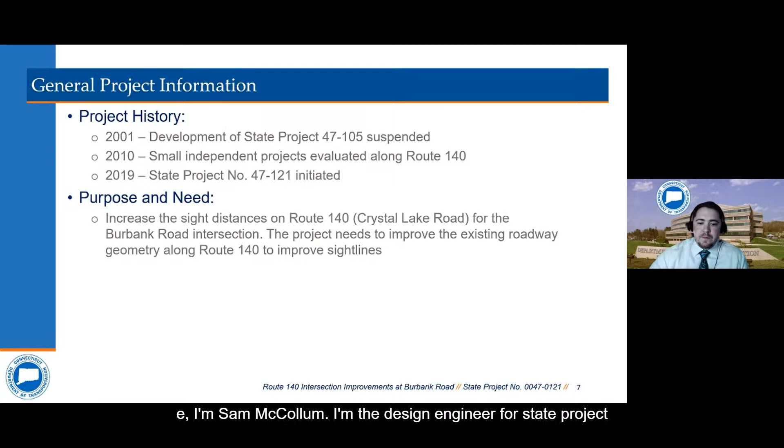Thanks, Ken. And with that, Sam will take us through the formal presentation. Thanks, Devin. Thanks, Ken. Hi everyone, I'm Sam McCollum, design engineer for State Project 47121, and I'll be taking you through the rest of this presentation today.

Starting off with a little bit of project background. So 47121 actually originates from State Project 47105, a corridor improvement project between Routes 83 and 30 along Route 140, which was suspended in 2001 due to overall public opposition and lack of funding. In 2010, the department began evaluating locations along Route 140 to initiate smaller independent projects. Then in 2019, State Project 47121 was initiated with a purpose and need to increase the sight distances on Route 140 for the Burbank Road intersection.

The project needs to improve the existing roadway geometry along Route 140 to improve these sight lines. Looking at our project schedule, we're set to complete design on August 30th, 2023, advertise for construction on September 27th, 2023, and construction is set to start in the spring of 2024. Currently we're at an estimated construction cost of about $4 million, with 80% federal funds and 20% state funds.

So just a brief overview of this presentation: we'll first go over our project location as well as some existing conditions. Then we'll review our crash history, which will bring us to our proposed improvements and the considerations we made when developing those improvements, and that'll bring us to our question and answer session.

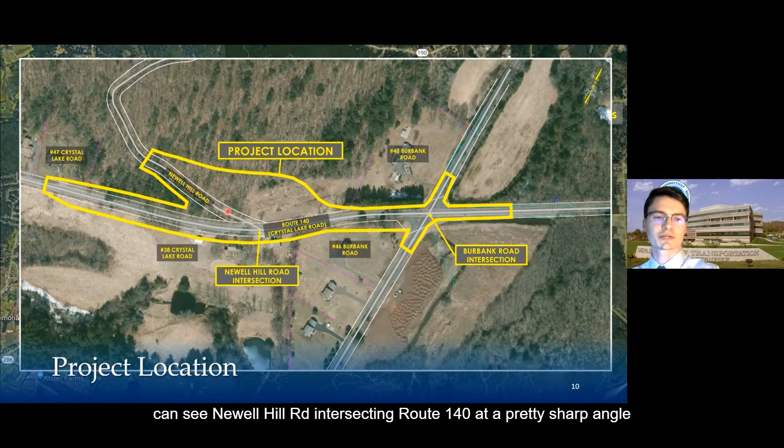All right, so starting with location. 47121 is located east of our Ellington Town Center here along Route 140 at its intersection with Newell Hill Road and Burbank Road. If we zoom in on our project location, you can see Newell Hill Road intersecting Route 140 at a pretty sharp angle, with Burbank Road intersecting Route 140 a little bit further east here.

Within this area we do have several residential properties, as well as wetlands on either side of Burbank Road and either side of Route 140, which then continue east outside of our project limits.

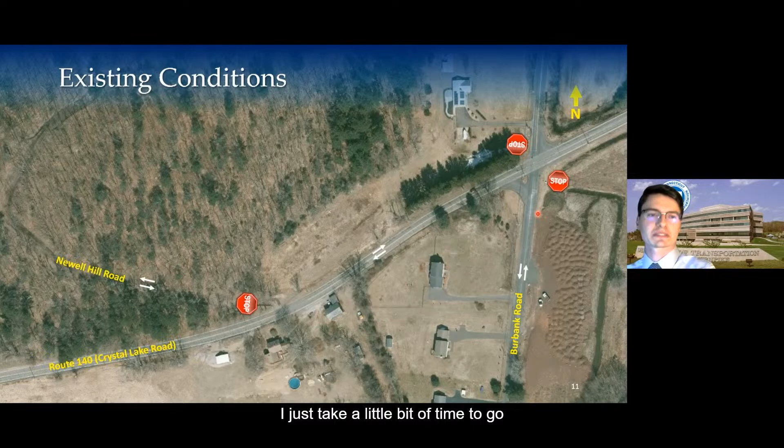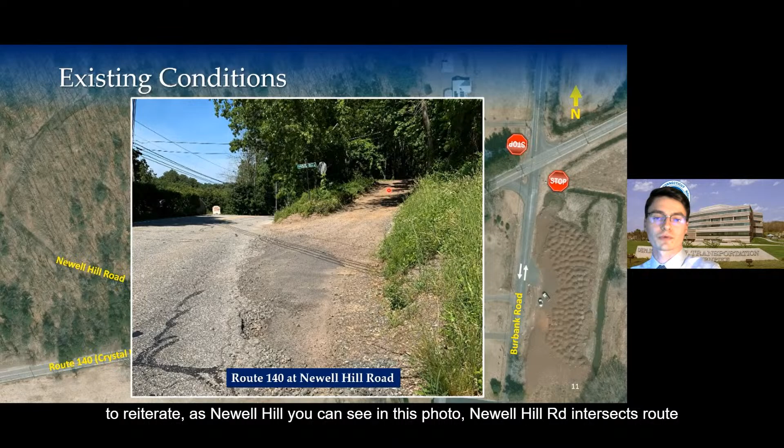I just want to take a little time to go through some existing site photos, starting at our Newell Hill Road intersection. As you can see in this photo, Newell Hill Road intersects Route 140 at a pretty sharp angle and at a pretty steep slope as well. At this intersection, Newell Hill Road is unpaved, but it does transition to pavement a little further north, outside of our project limits. As you can see, the side slope condition ends up being pretty poor — these slopes are very steep and heavily vegetated.

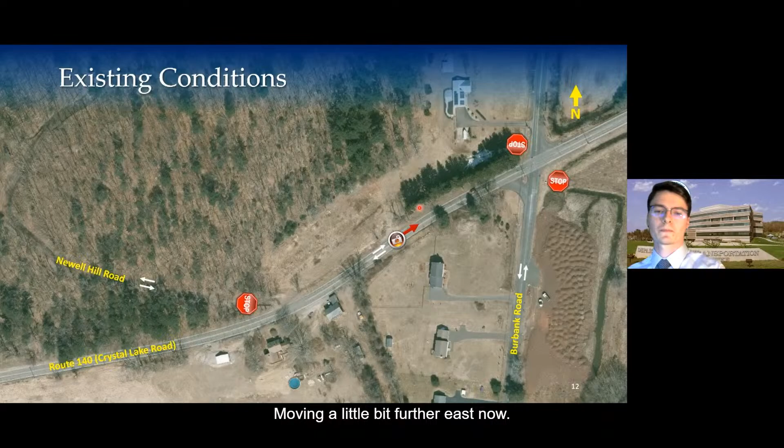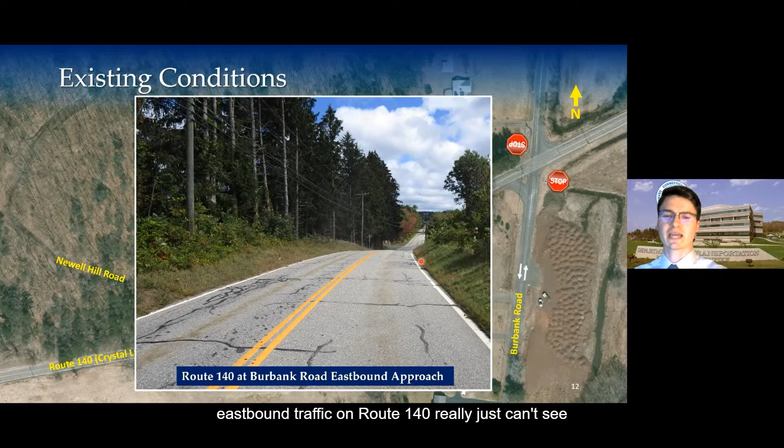Moving a little further east now, this next photo was taken looking down on Burbank Road from the top of Route 140, and I think it just demonstrates how eastbound traffic on Route 140 really can't see traffic maneuvering from our Burbank Road intersection, especially on the south end of Burbank there as well.

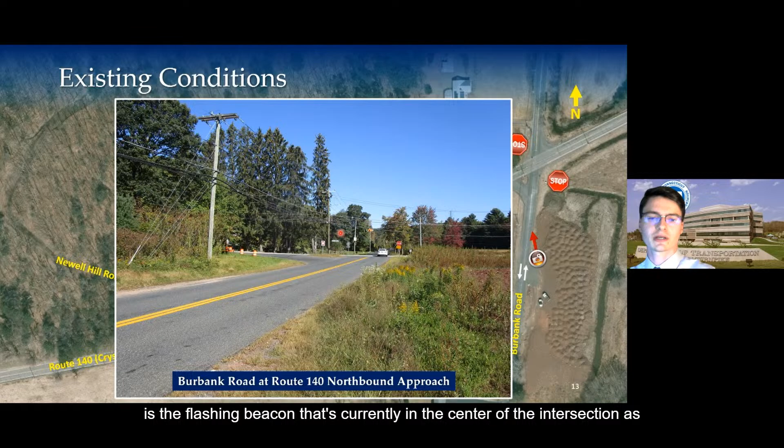Next photo was taken looking at our Burbank Road intersection from the south here. Really all I'd like to point out at this intersection is the flashing beacon currently in the center of the intersection, as well as this grass splitter island with a utility pole located on it.

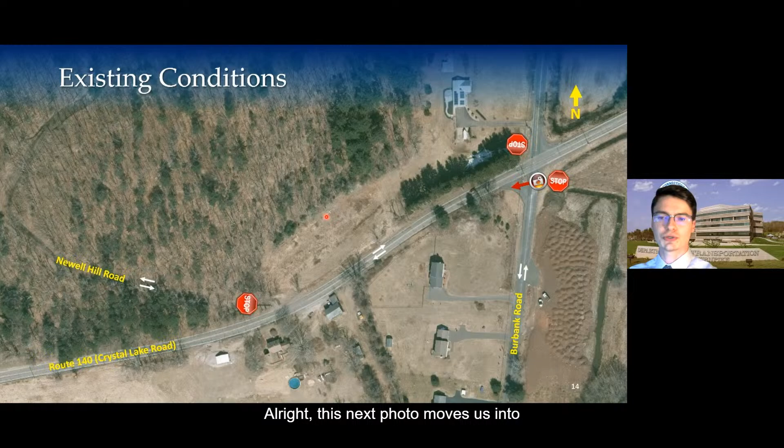This next photo moves us into the intersection now, taken from the perspective of a driver waiting at the south end of Burbank, looking west on Route 140. I think you can see in this photo just how quickly that sightline is obstructed, not only by the geometry of Route 140 in this area, but also these side slopes off to the side of the road here.

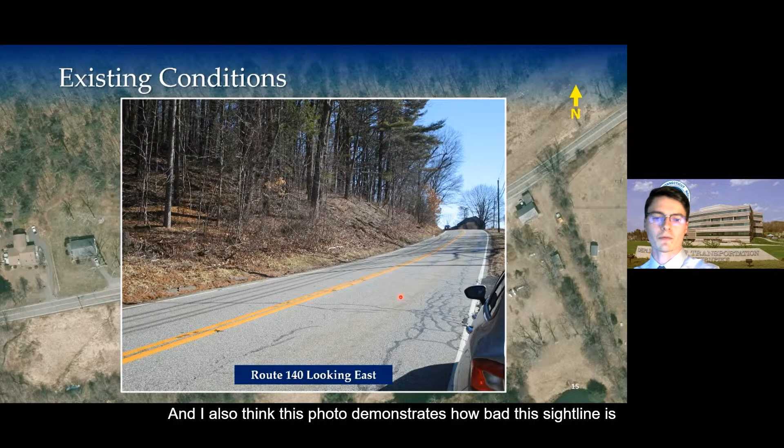Moving a little bit further west now, this next photo was taken looking east on Route 140. Again, all I'd like to point out are these steep side slopes between Newell Hill Road and Route 140. I also think this photo demonstrates how bad the sightline is for a vehicle traveling eastbound on Route 140 - you really just can't see traffic maneuvering from the Newell Hill Road intersection to the top of the hill either.

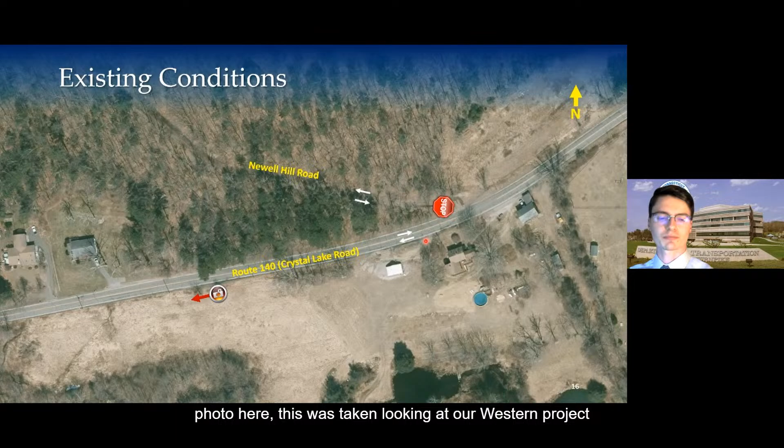This last photo here was taken looking at our western project limit. Really all I'd like to note with this is how steep these roadside slopes are directly off of the edge of road here on Route 140.

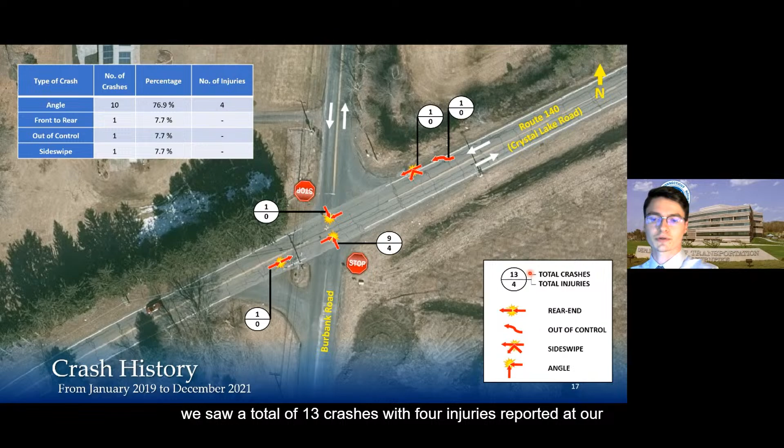Going to bring us to our crash history. Before I get into what you see in the center of your screen, I'll draw your attention to our legend on the bottom right-hand side. As you can see within the circle, we have our total crashes over our total injuries. In this case, from January 1st, 2019 to December 31st, 2021, we saw a total of 13 crashes with 4 injuries reported at the Burbank Road intersection.

To break that down a little bit, 10 of those crashes were angle type. 9 of which, and actually all of our reported injuries, were a result of traffic on the south end of Burbank failing to stop for traffic on Route 140. We also saw an additional rear end collision as a result of that same exact movement.

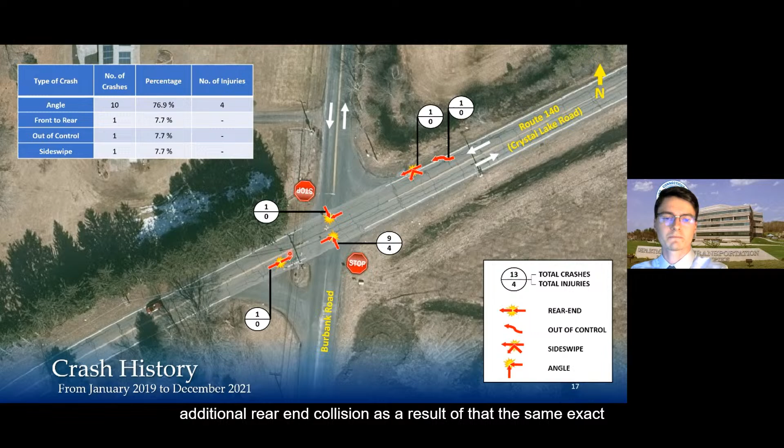Across the street from that, we had an additional angle type crash. Just east of the intersection, we had a side swipe and an out of control type crash at this location. I think it's also important to note that we actually saw no crashes reported at the Newell Hill Road intersection during this time period.

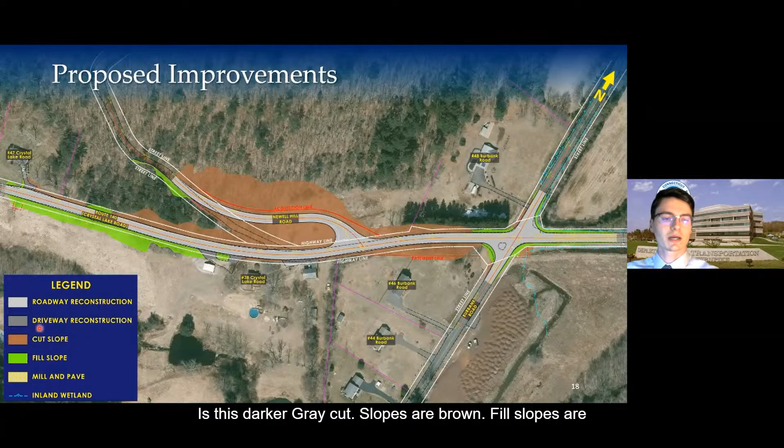All right, so that's going to bring us to our proposed improvements. I just want to draw your attention to the bottom left-hand side of your screen, where you can see the legend. Here you'll see our roadway reconstruction is this lighter gray, driveway reconstruction is this darker gray, cut slopes are brown, fill slopes are green, mill and paved sections are this yellow hatched line style, and any wetlands are this line style here.

Zooming in on the first section of the project, you can see any highway line or street line is going to be this white line style. Any acquisition or easement line is going to be this red line style. Then we have this dashed black line - that is our existing edge of pavement. And this solid black line here, that is our proposed edge of pavement.

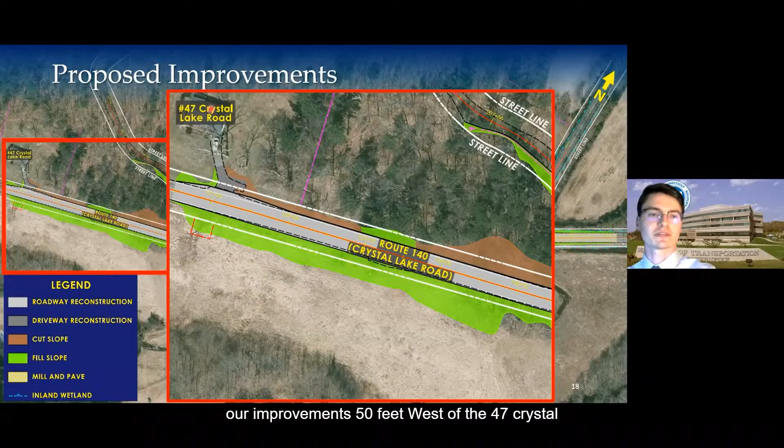So with that, you can see in this figure we're going to be starting our improvements 50 feet west of the 47 Crystal Lake Road driveway, where we're going to be doing some very minor driveway apron reconstruction to account for the very minimal widening of Route 140 in this area. Again, I just want to draw attention to the difference between that dashed black line and that solid black line here - very minimal widening in this area. We'll also be doing some cross slope correction to help with driver safety and improve drainage here as well.

In this figure across the street, you can also see the grades that we're proposing on 38 Crystal Lake Road.

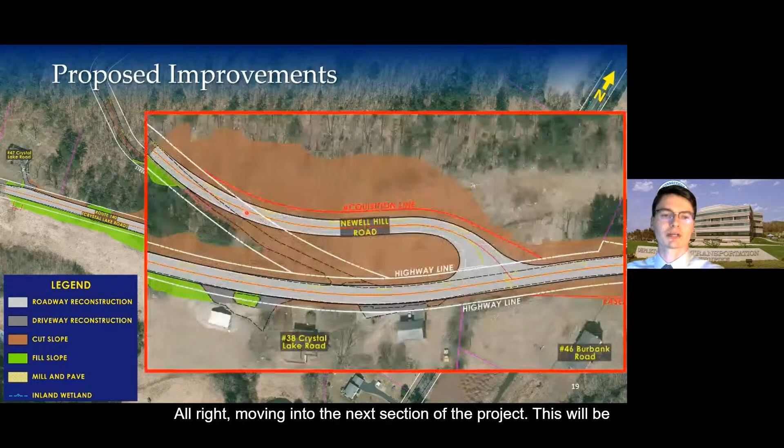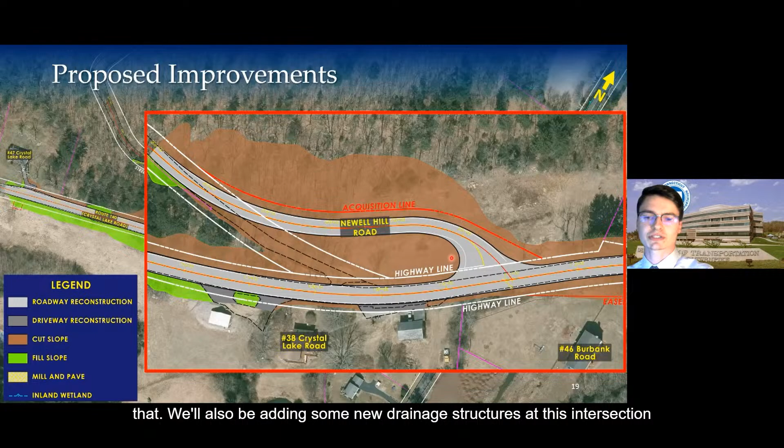All right, moving into the next section of the project. This will be the realignment for Newell Hill Road. We're now going to be teeing up that roadway with Route 140, and you can see the grades associated with that. We'll also be adding some new drainage structures at this intersection, as well as providing guide rail where we tie back into our existing roadway at the north end of the project here.

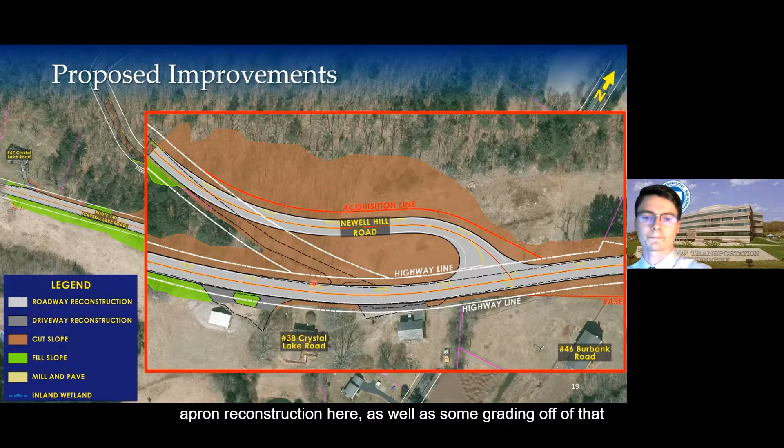Across the street from that, you can see the continued impacts to 38 Crystal Lake Road. Really not a ton to note here, just that we will be performing some very minor driveway apron reconstruction here, as well as some grading off of that, to account for the very minimal widening that we're doing to accommodate uniform 12-foot travel lanes and 2-foot shoulders.

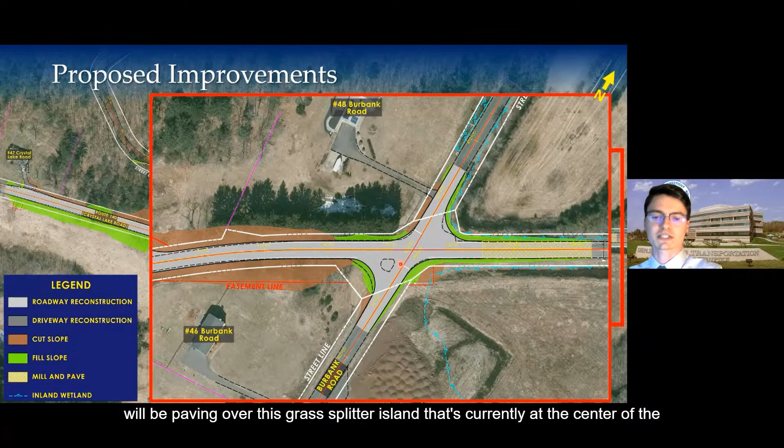And lastly, moving into the last section of our project here. So these are going to be our impacts at Burbank Road. Really not a ton to note here, just that we will be paving over this grass splitter island that's currently at the center of the intersection, and we will be grading within a sightline easement on 46 Burbank Road.

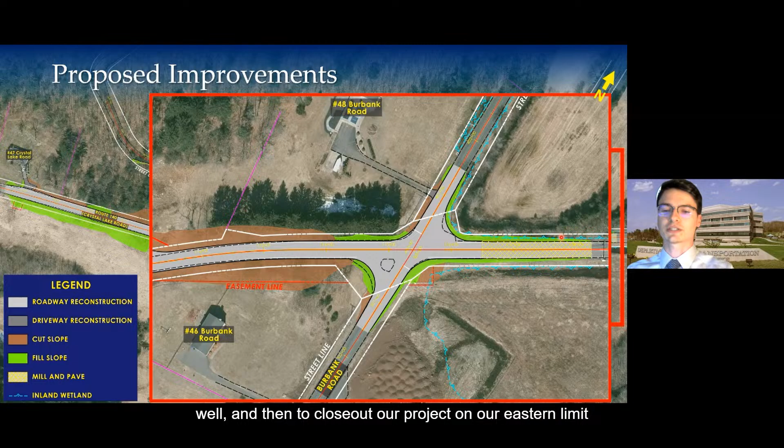Across the street from that, you can see the impacts to 48 Burbank Road. Really not a ton to note here, just that we will be doing some minor grading, as well as some minor driveway apron reconstruction here as well. And then to close out our project on our eastern limit, this is where we'll be performing a mill and pave to help reduce impacts to the adjacent wetlands on either side of Route 140 here.

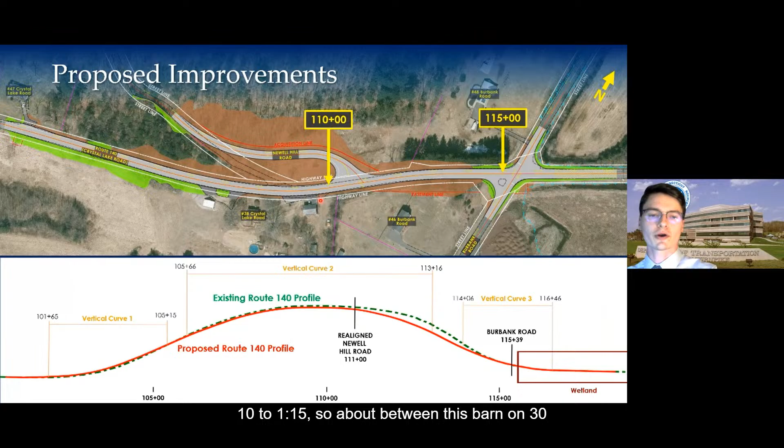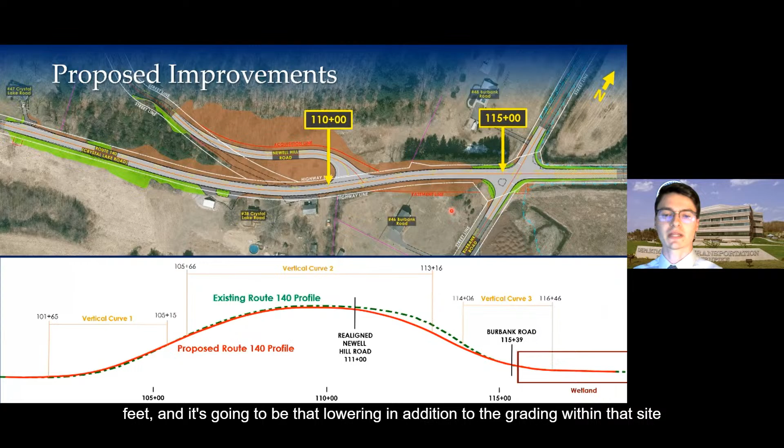Coming back out here, I just want to make note of the vertical height adjustments that we'll also be making to Route 140. Specifically between stations 110 to 115, so about between this barn on 38 Crystal Lake Road to just west of our Burbank Road intersection, we're going to be proposing to lower Route 140 by about 4 feet. And it's going to be that lowering in addition to the grading within that sightline easement on 46 Burbank Road. That's going to allow for a significant improvement for all vehicle sight distances at Burbank Road looking west on Route 140.

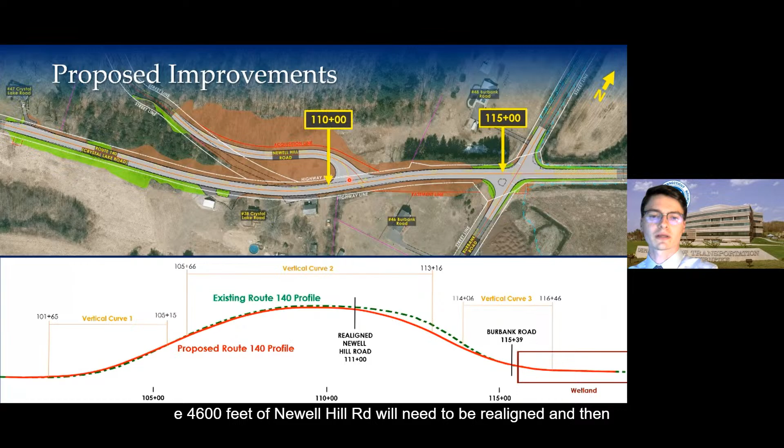And all those improvements that I just mentioned are going to require reconstructing about 1,800 feet of Route 140, 600 feet of Newell Hill Road will need to be realigned, and then 150 feet on either end of Burbank Road will need to be reconstructed as part of these improvements.

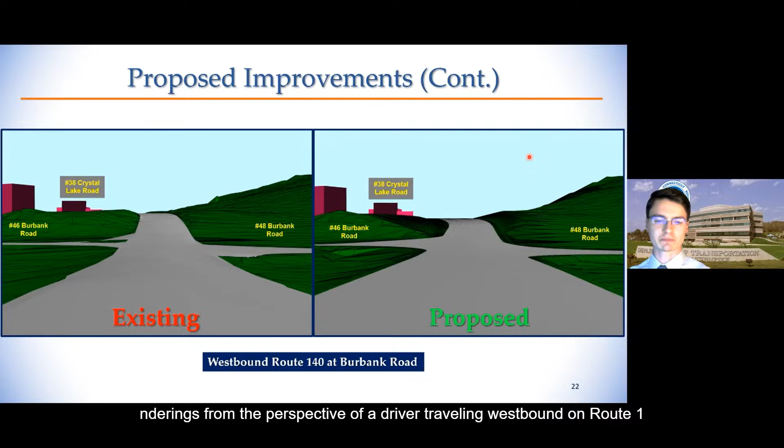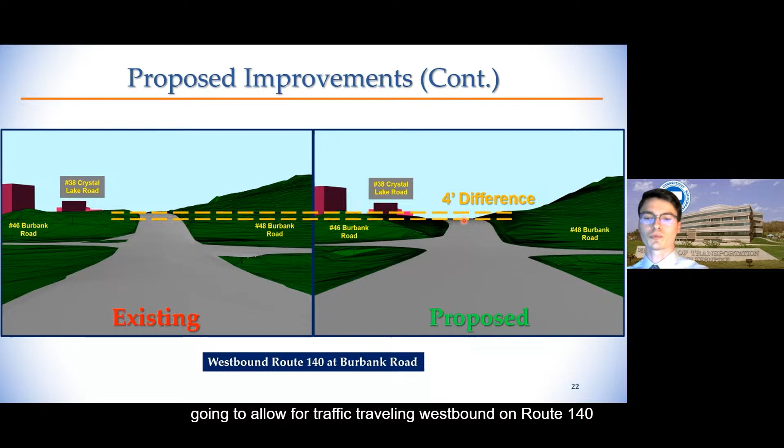So just to better demonstrate the lowering of Route 140 in this area, these are two 3D renderings from the perspective of a driver traveling westbound on Route 140. As you can see in our existing condition, that sightline is very quickly obstructed by not only the geometry of Route 140 in this area, but also these side slopes here. And now, if we lower Route 140 by that 4 feet and grade within that sightline easement, that's going to allow for traffic traveling westbound on Route 140, as well as waiting at our Burbank Road intersection, to see much further west down this corridor.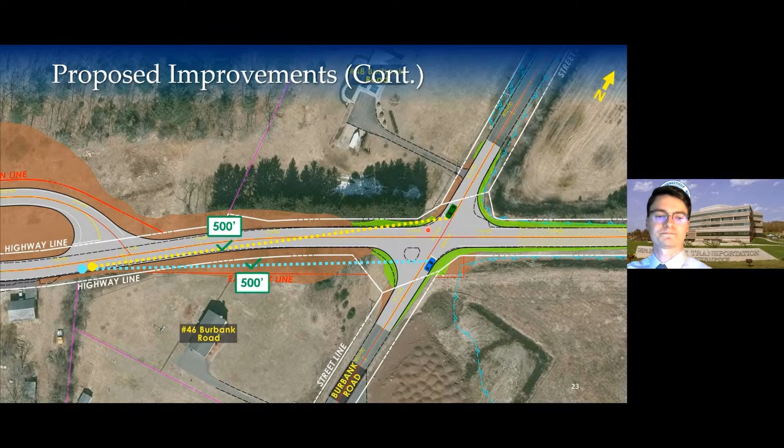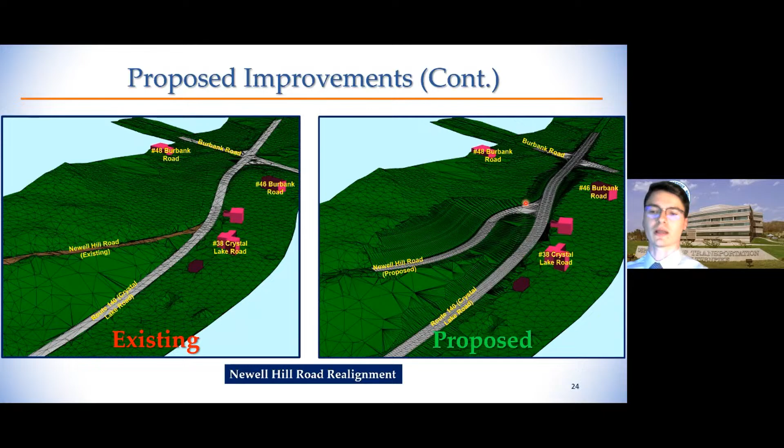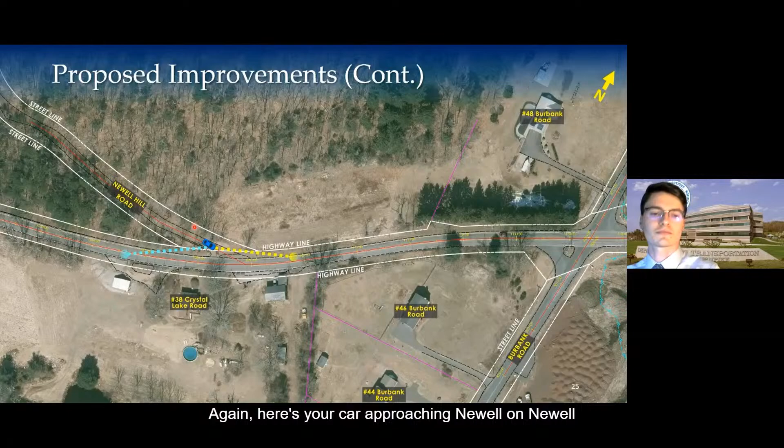To show off the benefits of this improvement: here's your car approaching Newell Hill, approaching Route 140 from Newell Hill Road, and these are the two sight distances associated with that. 129 feet, 155 feet, not the greatest. I'm sure if you've ever tried to turn from this intersection, you'll know you really just can't see past either of these embankments here, and the roadway becomes quickly obstructed by both of those embankments, and you just can't see past this curve on Route 140.

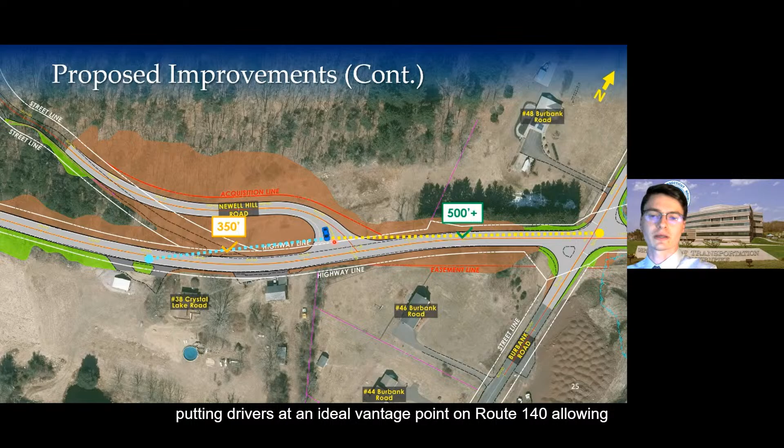But now, with our proposed improvements to realign Newell Hill Road, we are now going to be putting drivers at an ideal vantage point on Route 140, allowing them to see over 500 feet looking left and 350 feet looking right.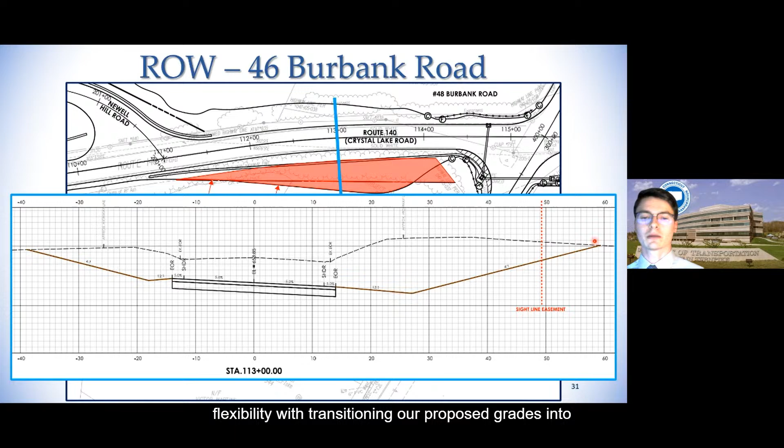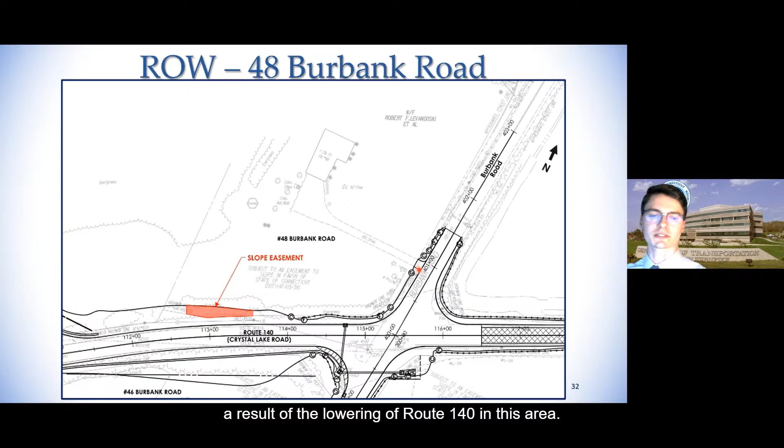Moving across the street now to 48 Burbank Road. Not a ton to note here, just that we are proposing a slope easement on this property, again, as a result of the lowering of Route 140 in this area. If I slice the roadway here, you can see those cut slopes in the same cross section I showed in the previous slide, just on the opposite side of the road now.

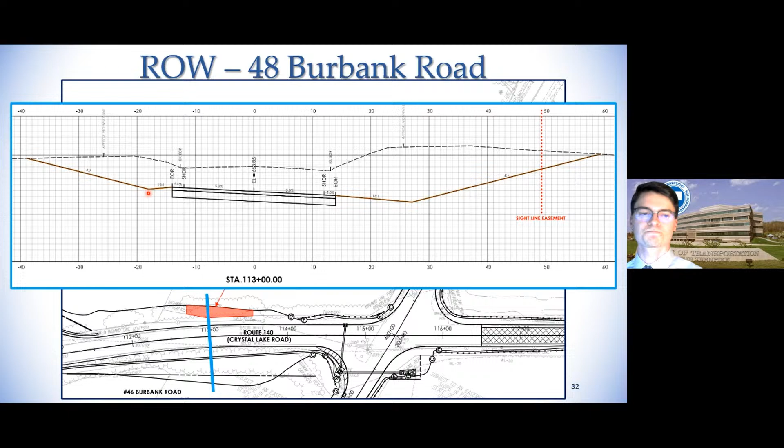And lastly, looking at our right-of-way impacts to the undeveloped property at the southeast corner of the Burbank Road intersection, we're just going to be proposing a drainage easement as a result of some new structures that we're adding at this intersection.

And with that, I'm going to turn this over to Matt Giannakopoulos. He's our right-of-way coordinator for this project, and he's going to talk about right-of-way policy as it relates to this project. Thank you, Sam.

I'm Matt Giannakopoulos, a project coordinator with the Department's Division of Rights-of-Way. It's our office's responsibility to acquire the property rights needed for transportation projects. As Sam just did a great job outlining, the proposed design requires the acquisition of some property as well as some easements from a few of the adjacent properties near the project. So I'm here tonight to give you a brief overview of the department's right-of-way acquisition process.

All property rights required will be acquired in accordance with the Connecticut General Statutes sections 13A-73, 13A-98E, and whenever there is federal money used in any aspect of a project, the department must adhere to what is known as the Uniform Act.

At that point, we determine the fair market value of those rights, and we use that to establish an offer of just compensation. That offer is sent out to the property owners in writing, and a right-of-way agent is available to meet with the property owner. They will, in great detail, explain the project, the impacts to that particular property, and they'll also explain how the state developed that offer. The property owner will have a reasonable time to consider the offer and enter into negotiations if they so choose.

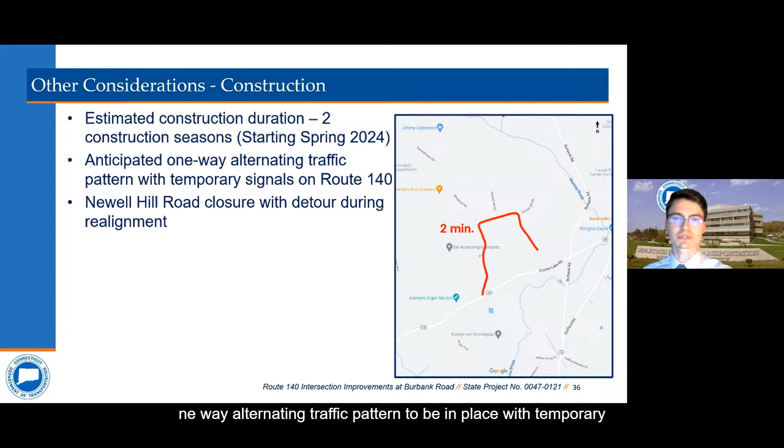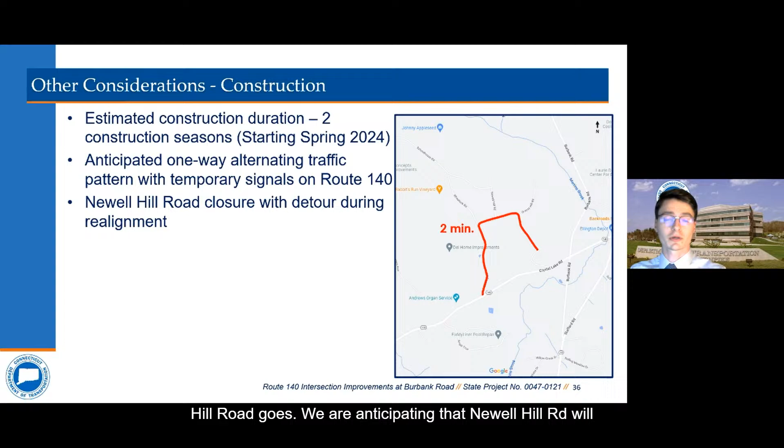We are anticipating some kind of one-way alternating traffic pattern to be in place with temporary signals only during the reconstruction of Route 140. As far as a closure of Newell Hill Road goes, we are anticipating that Newell Hill Road will need to be closed only for the duration of the roadway's realignment.

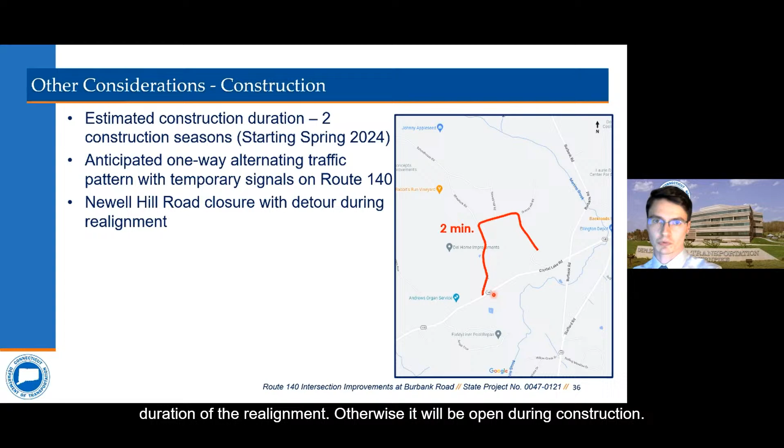We will have a detour in place similar to what you can see here on your screen in red, which will redirect traffic from Newell Hill onto Ludwig for access to Route 140. Again, I'd just like to reiterate that Newell Hill Road will only be closed during the duration of the realignment. Otherwise, it will be open during construction.

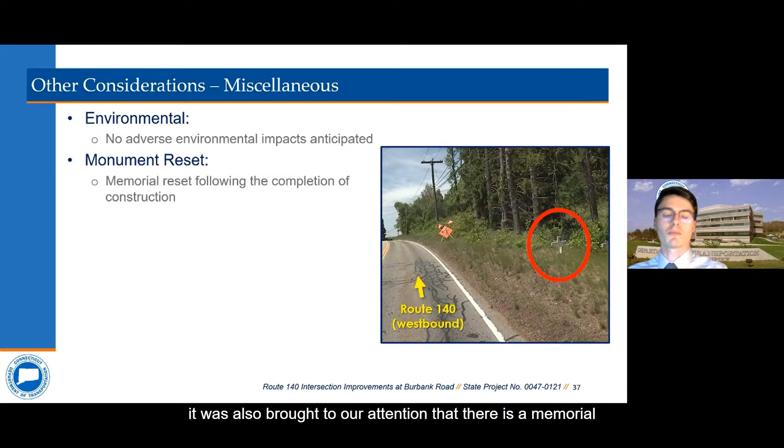Looking at our environmental considerations, we have no adverse environmental impacts anticipated as part of these improvements, which is good. It was also brought to our attention that there is a memorial located between 38 Crystal Lake Road and 48 Burbank Road along this Route 140 westbound embankment, and we will be resetting that memorial following the completion of construction.

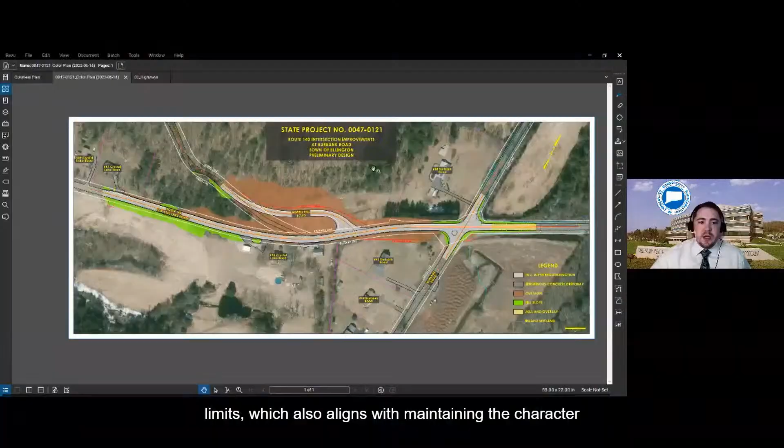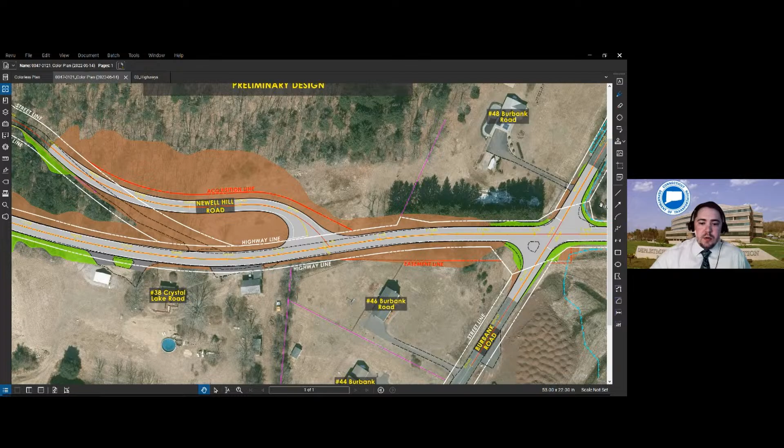There are several aspects that will contribute to traffic calming on this project. One is maintaining narrower shoulders throughout the project limits, which also aligns with maintaining the character of the roadway, this being a rural state road. It's pretty typical to have narrower shoulders, narrower travel lanes, which we will be preserving with the project, and those two things definitely factor into traffic calming, as well as improving safety. The primary purpose of this project was to improve the sight lines at Burbank Road. By improving those sight lines, it will most definitely contribute to improving safety and hopefully reduce crashes at that intersection, which would all contribute to calming traffic in this location.

Thank you, Devin. Thanks.

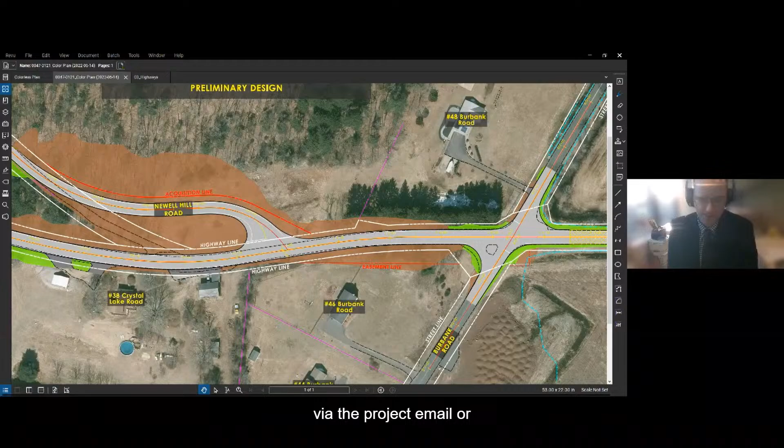I see that we have another question, so I'll go ahead and read that one. The question is, has there been consideration to the settling of Route 140 east of Burbank? The cross slope doesn't meet federal standards and should be addressed while this project is ongoing.

Devin, can I have you answer that question? Sure. Yeah, so the department is aware of the issues east of Burbank there with the cross slope and the pavement condition. Unfortunately, based on the purpose and need of this project, we are unable to include it without further extending the design timeline. So it is on the department's radar, and our pavement design team is considering it for future projects.

Okay. Thank you, Devin.

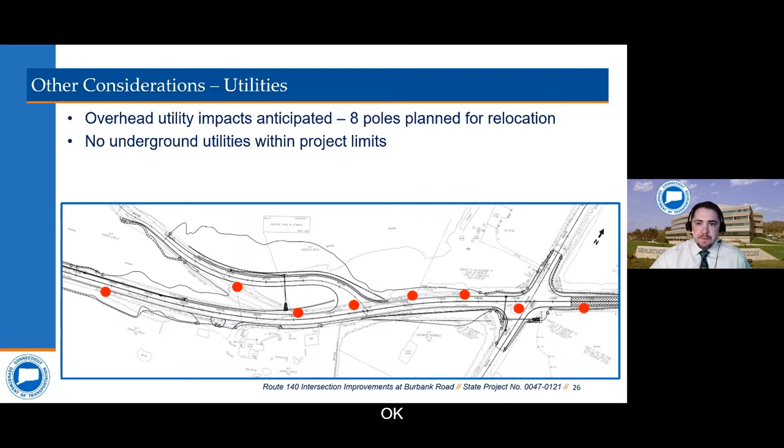Okay, thank you, Devin. Thank you.

So I do have another question that I will read now. The question is, the 2 fields wetland areas east of Burbank Road intersection have frequently overtopped 6 inches to 12 inches during springtime rain. Are there any considerations for hydraulic relief to prevent this roadway hazard?

Devin, can I have you start off answering that one? Sure. Yeah, so there were some considerations about the culverts there. Again, this would coincide with my answer to the previous question on the pavement condition. This was a contributing factor as to why the department decided to go with providing the improvements at the Burbank Road intersection under this project, and eyeing that location further east for a standalone project in the future as we consider design options.

Okay, thank you, Devin. Thanks, Steve.

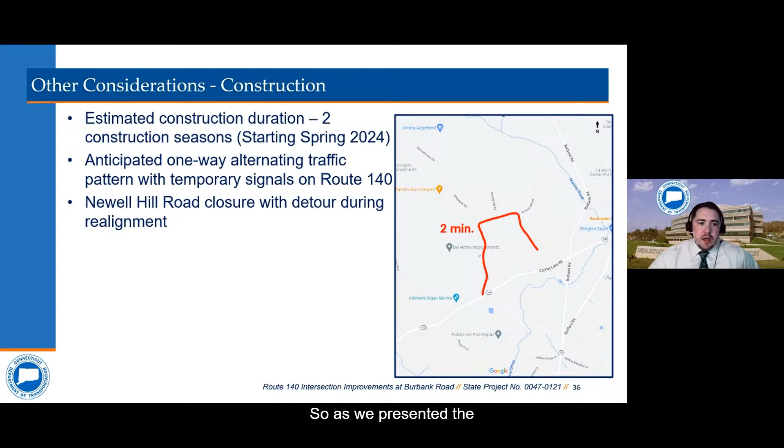So as we presented, the estimated construction duration would be approximately 2 construction seasons, which start on April 1st and then November 30th. And so within that construction time frame, we are anticipating a one-way alternating traffic pattern, which would have temporary signals on either end to control traffic through 140.

As far as the duration goes, it's still early in the construction sequencing to be developed for the project here. However, the department will coordinate with the town and its emergency services to mitigate the disruption to residents during that work.

But it is anticipated that we would need to maintain that one-way alternating traffic to construct one side of the roadway while maintaining traffic on the other side. And then once one side of the road is complete, we would then shift traffic over to the newly paved section of roadway and finish the other side of the road.

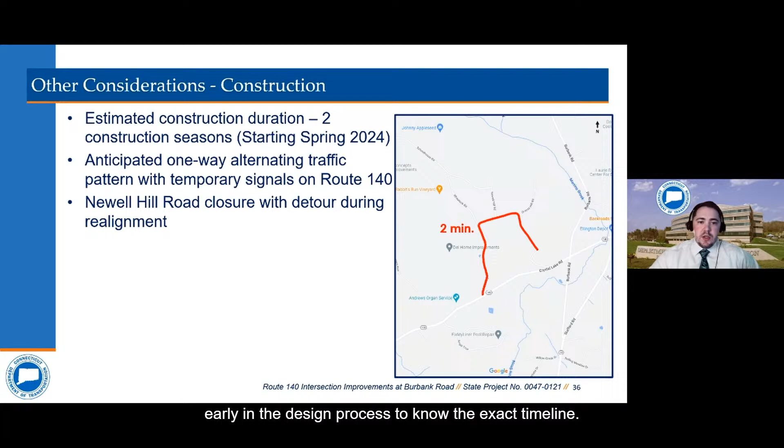Again, it's still early in the design process to know the exact timeline for that one-way alternating traffic pattern, but the town and residents would definitely be informed of any detours or delays well in advance of construction taking place. Thank you. Okay, thank you, Devin.

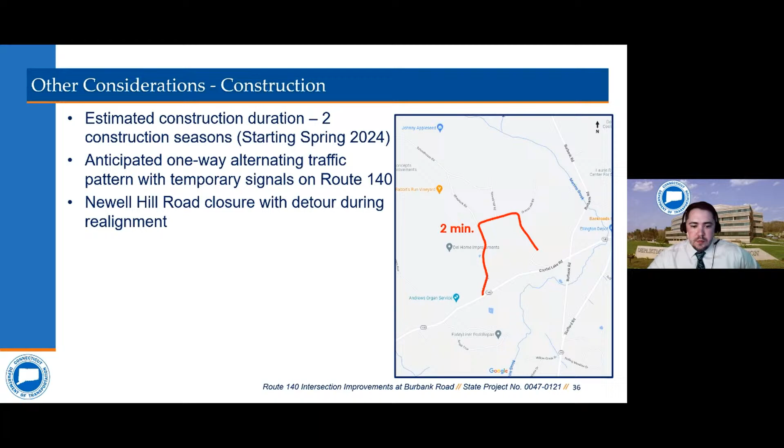All right, I have another question that I will read now. It's a follow-up question to an earlier question: can you explain the drainage that will be included to mitigate the current runoff from Newell Hill Road and the land to the north?

Devin, would you like to start that one off, please? Sure. Sam, can you pull up the black and white plan for me? So this being preliminary design again, drainage design is still underway. So we have a lot of work to do as far as working out the kinks with the drainage design.

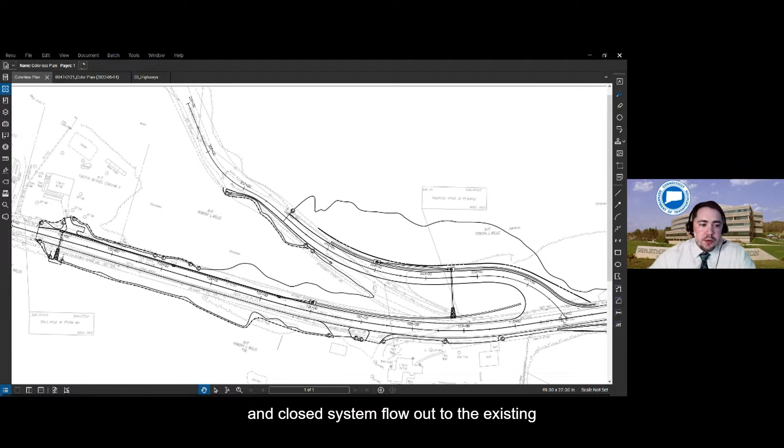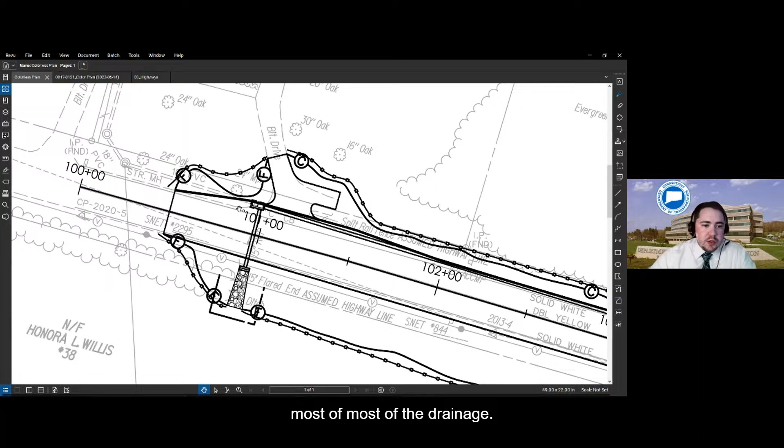But the intent is to definitely not overburden the system that's there, and we would be working to direct overland flow and closed system flow out to the existing drainage system at approximately station 101 there. Sam, if you can point over there, yes. Yeah, so most of the drainage runoff that will be funneled from our project, it will be conveyed to that drainage system there and outletted across Route 140 to the south.

Okay. Thank you, Devin. Thanks, Steve.

So we have a phone message. So glad to see that a lot of different avenues are being taken advantage of to ask questions. It's great to see.

The question is, property owners of the mowing field north of Route 140 and east of Burbank Road are concerned about potential drainage issues in their field as a result of the improvements. Will the project improvements be diverting additional water into the field?

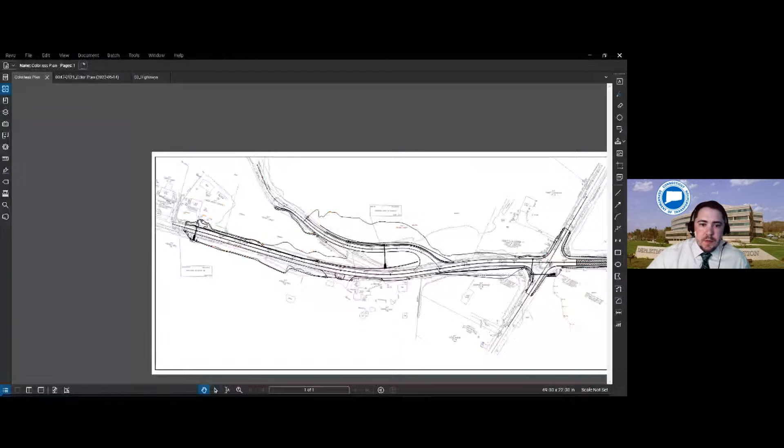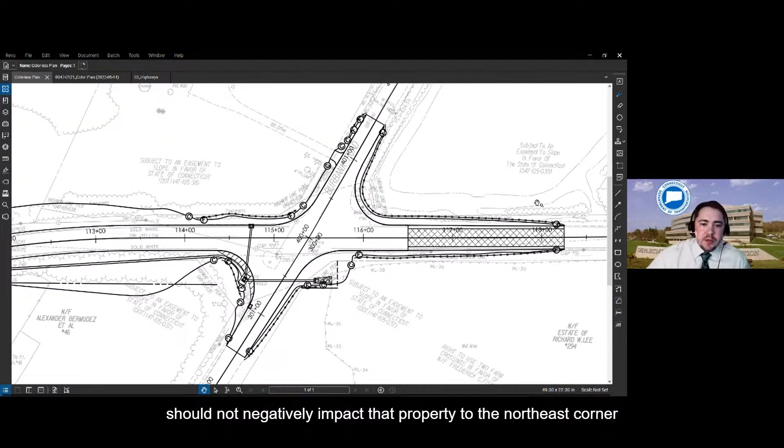Devin, can I give you this to answer? Sure, Sam, can you pull up that plan again? So the proposed improvements should not negatively impact that property to the northeast corner of Burbank and Route 140. We won't be directing any closed system flow to that area.

So anything that's draining to that area today would continue to drain to that area. With our cross slope corrections, you should hope to see a little bit of a reduction, but there will essentially be no change with the proposed improvements. As you can see on the plan here, we have some catch basin structures. Again, this is preliminary, but we would be directing flow to the outletting to the southeast corner of the intersection and adjacent wetlands.

Okay. Thank you, Devin. All right, we have another question that I will read now.

During the winter time, cars frequently slide into the wetland areas due to the crown east of Burbank Road intersection. Can the project be extended slightly to resolve this road hazard condition as part of this project?

Devin, can I have you answer that one, please? Sure. So during the wintertime, cars frequently slide into the wetland areas due to the crown east of Burbank Road intersection. Can the project be extended slightly to resolve this road hazard condition as part of the project? I'm not sure which location you're referring to east of Burbank, if that was northbound or southbound, but Sam, can you pull up the plan?

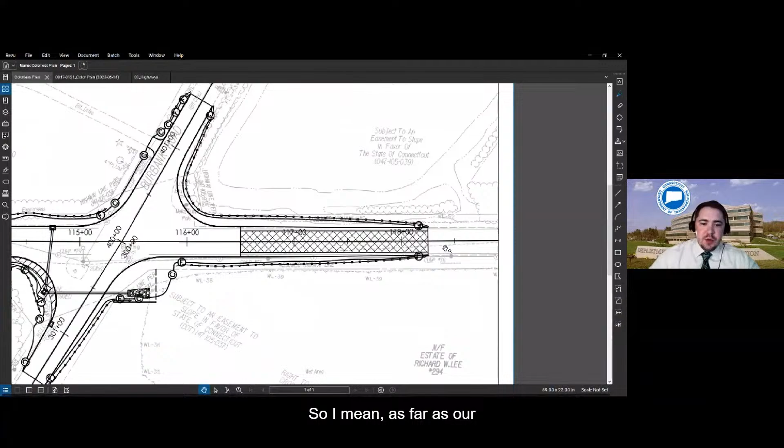Yeah, I think it's the same area that you had referenced before, Devin, off to the east of Burbank Road there, that wetland area. Okay. Yeah, so as far as our project limits go, we're terminating at the location you can see on the screen there, right where Sam's cursor is, just to the right there. Yep. And that would be the extent of our paving limits.

So up to that point, we would be correcting cross slope. So we would be flattening the crown up to that point with a transition length to transition to tie into the existing cross slopes that are out there today.

The area further east of this intersection unfortunately isn't covered under the project's full scope. The primary purpose of this project is to address the deficient sight lines at Burbank Road, but it is on the department's radar.

Thank you. Okay, thank you, Devin.

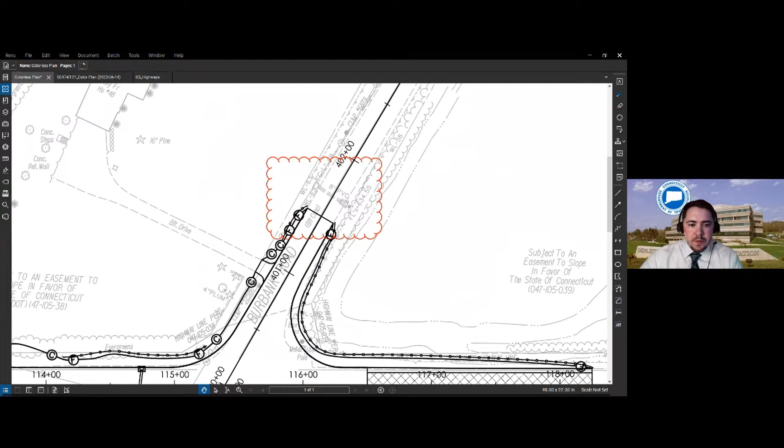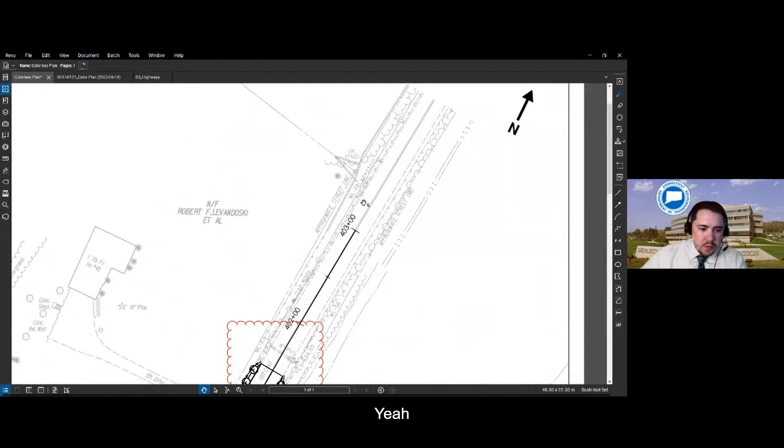I believe it was also asking about the curtain drain on the west side of Burbank Road. Yeah, I'm not sure. Is that in the same location? Yeah, I think they're referring to the same location there that acts as a weir over there. Yeah, our project limits end just before that drainage system, so we shouldn't be affecting that as part of the project.

Okay. And again, Rob, I know Rob's asking a few questions here. If you would like, you can reach out to us through the project email, provide some contact information, and we would be happy to go over more of your concerns in depth if you wanted to discuss them.

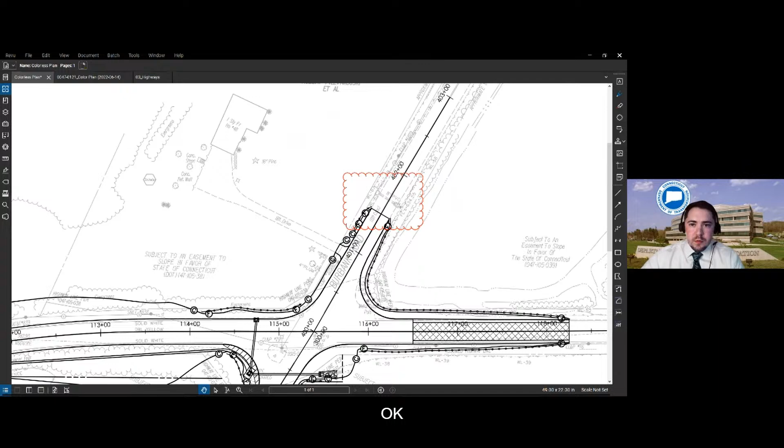Okay, thank you, Devin. I do want to give a last call for comments, questions. We've currently discussed all the questions that we've received so far.